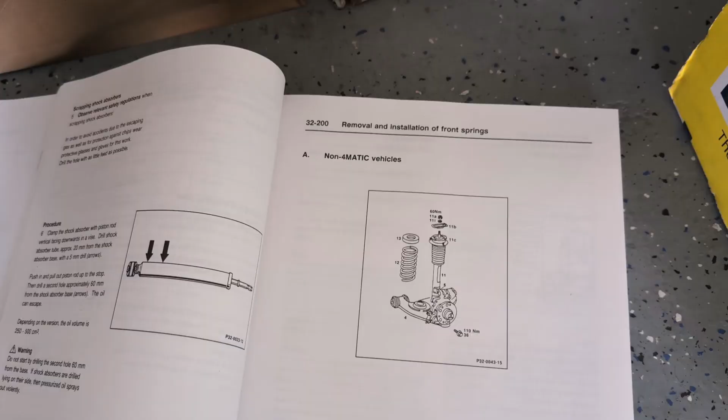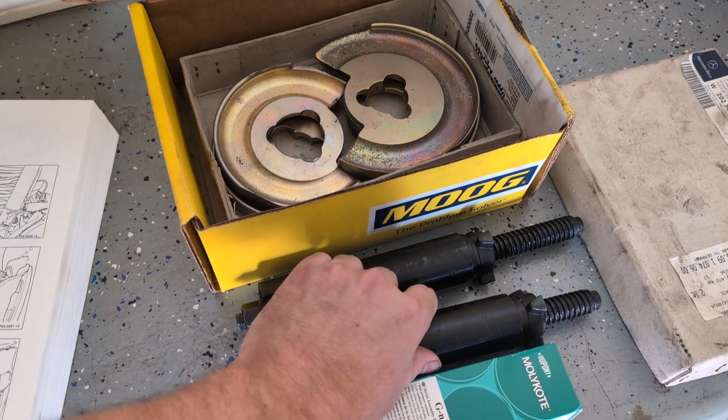Okay, just for what I got here, my setup: I got the book open to 32-200 for the removal of the spring. I actually just recently got the OEM spring compressors. I had the cheap ones you get on eBay, and it's a little scary working with springs, there's a lot of stored energy in there. And then I also was able to get the Mercedes plates.

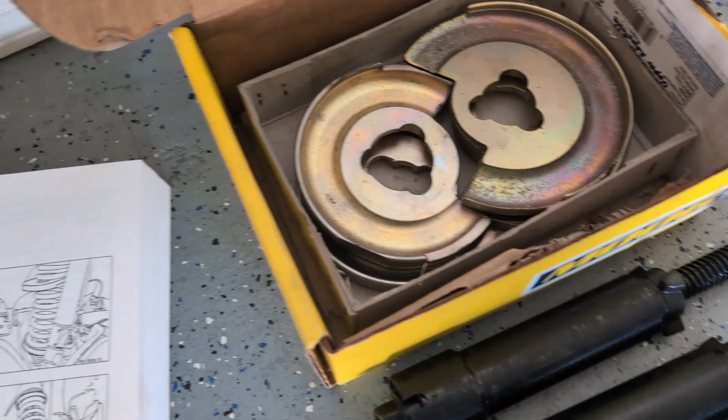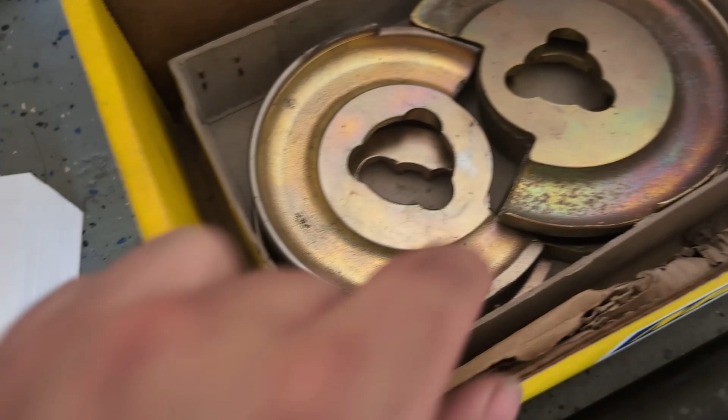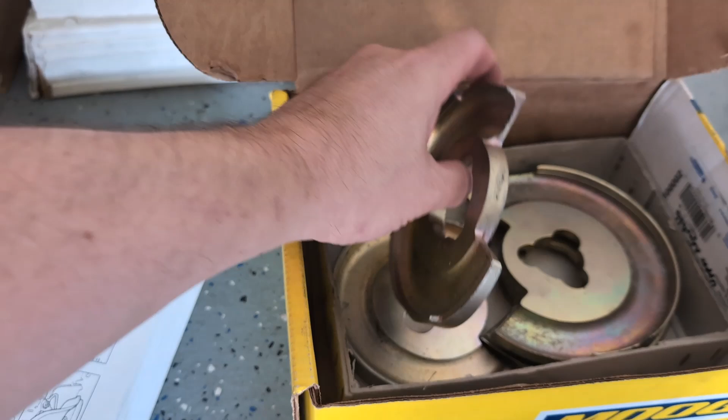So once this thing's up in the air and I get the wheel off, it's going to go down pretty easy. Basically you just put the plates, I believe it's going to be the smaller ones for me here, and you put them in the center and just kind of turn them around until you get the bottom one on the bottom and the top one on the top. So that one goes on top, and this one should be going on the bottom.

And once you got the springs in between the plates, then you can insert your compressor. I got two, just because that's what it came with. The longer one is for the front and the shorter one is for the rear. And then I got the molykote lubricant, so I'm gonna lube this up before I go and actually use it, and then probably after it's done too, before I store it.

And then here's the parts. Would have liked to go Mercedes on it, but it's kind of a big price difference, and I'm okay with this. This is the original manufacturer. I don't know if the parts quality will be the same.

You can usually tell here. So here, made in Brazil, so that could be questionable. We'll find out. For the ball joints, made in Malaysia, so yeah, we'll see about those. But yeah, anything's better than what I got on here right now.

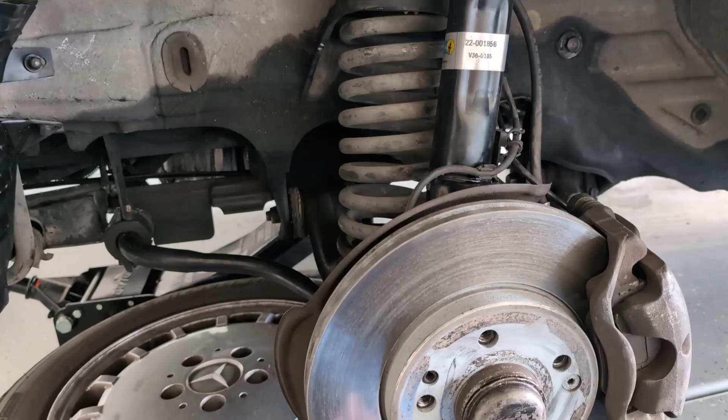So gonna get this up in the air and get started. Okay, car's in the air. Got the tire under there just in case. And I'm gonna get started with this spring. This is the front driver's side. So I got my lower piece.

And this is what I'm going to do, is just find a place where it goes in. Okay, so I got it in there, and then you just need to rotate this. It should make sense here, hopefully, but I want to rotate this until it gets down to the bottom. You see how it's starting to move down the coil? Okay, just keep going. That might be it right there. I think that's all I can get.

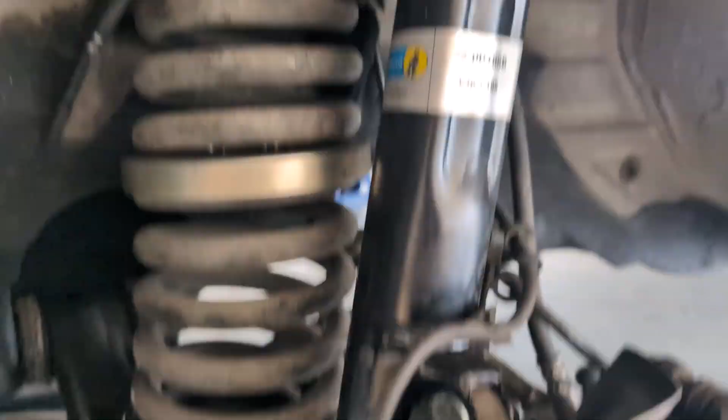So call that one good, and then let's try the top. This is going to need to go this way. Okay, so now do that same process. And this is the part where Mercedes was saying you need to have 8 coils worth. We'll see if we get that here. If we look at what we got right now, we got 1, 2, 3, 4, 5, 6. So I'll go up just a little bit more, see if we can get it.

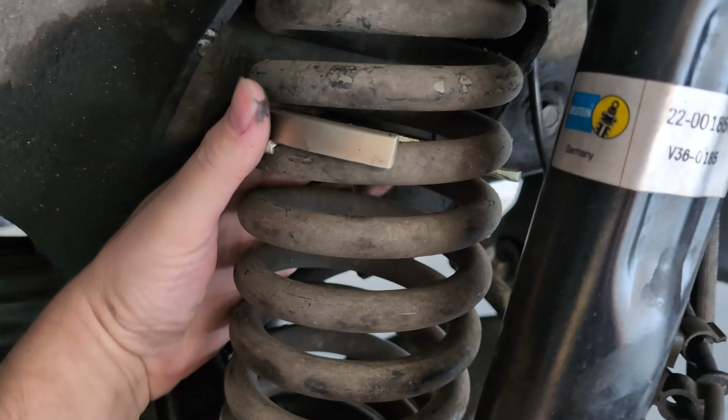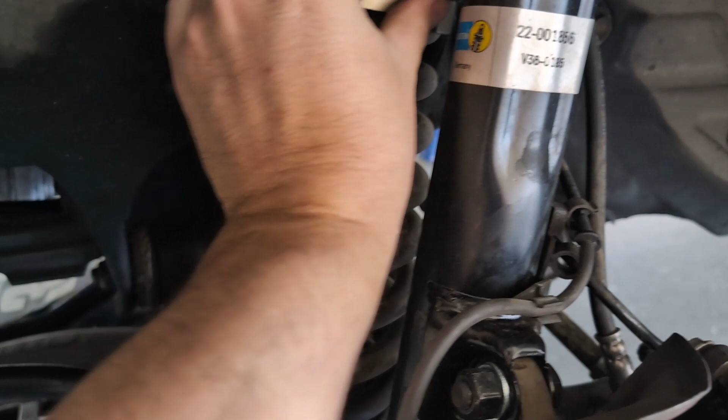And then we can put the compressor in. Okay, this might be tough, but we'll see. Okay, yeah, I think that works. Okay, yeah, and see, if you try to pull it straight out, it won't come out. All right, let me try the next step. So 1, 2, 3, 4, 5, 6, 7, 8. So I got roughly 8, maybe 8.5. And yeah, that's as far as that one will go.

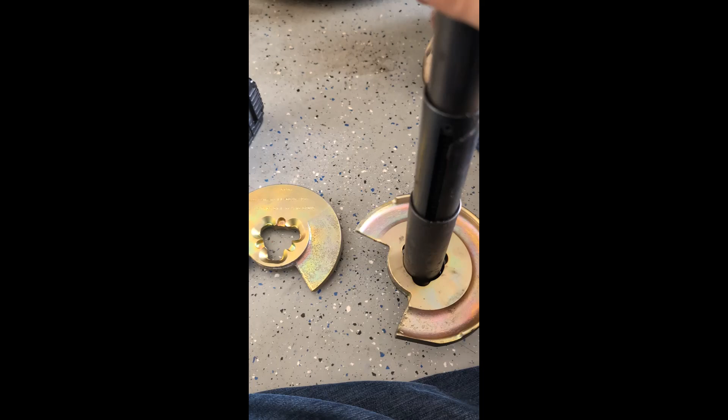Okay, great, here's what's gonna be happening here. So I got this extended out, this is the longer compressor. I'm gonna go ahead and just put the bigger plate on, which is more for, I think, the W126 or 129. So here we go, got the bottom piece on. Then what's gonna happen is you're going to feed this up. There's a hole underneath the shock, the spring.

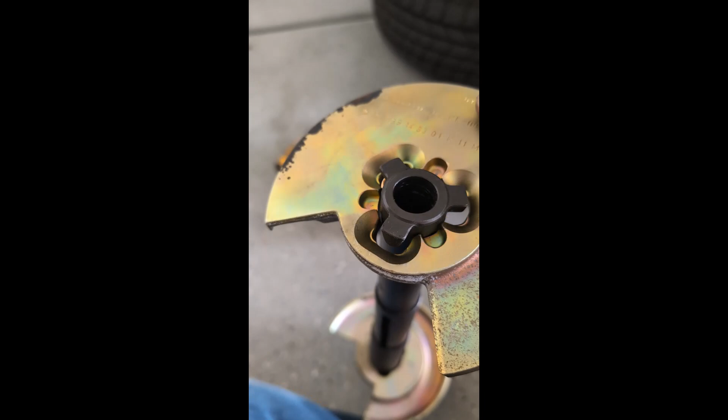Okay, so you feed it up through the bottom plate. When you get to the top plate, you'll have to go through at the right angle to get those little arms through, and then you can kind of turn it. And then you want to get those in those divots that are made for this. There's 3 of them, you want to get that in there. When you get that in there, that's when you can start tightening it up.

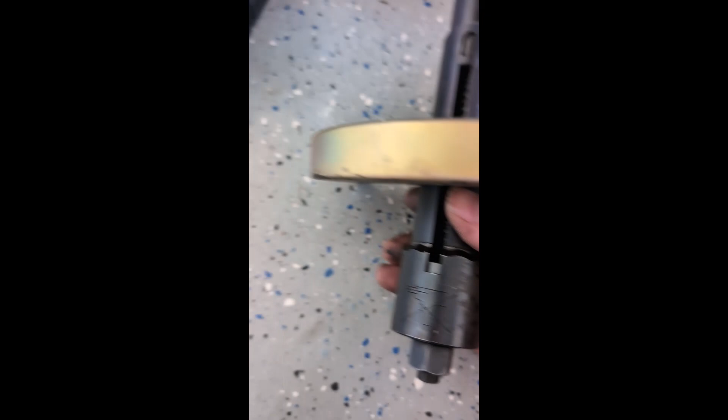And so when you start tightening it up, you'll notice, at least on this part, it says no impact tools, so you're supposed to just do it by hand. And this one, since it's genuine, is quite easy to turn by hand, actually.

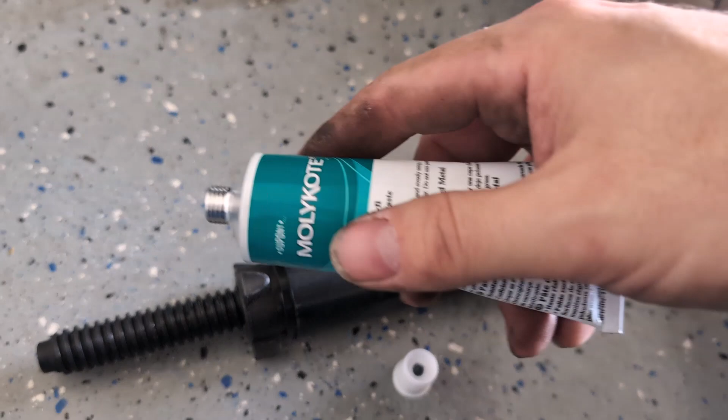But I'll leave that one up to you. I'm pretty by the book, so I'm just going to get a ratcheting wrench or something like that and just do it. One last step before I get started is I'm going to use that lubricant, the metal assembly paste. I'll put some on here and get a rag to wipe it around the threads.

Okay, I got it in there, and just holding the bottom, give it a couple twists. I know that it's engaged with that top plate in those particular holes it needs to be. Then you can start tightening up on the bottom just with your hand, and that will start moving the base up into the bottom plate.

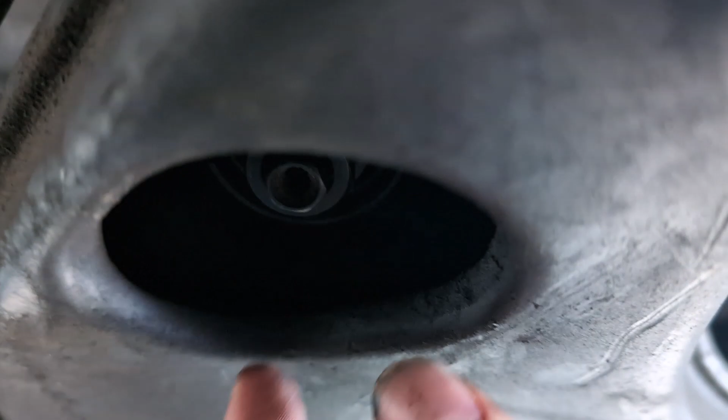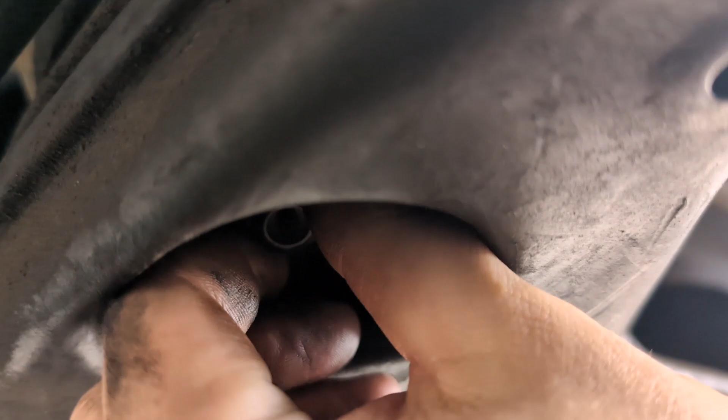Once that gets tight, I'll get the wrench out. Let me show you where I'm working with too. There's hand tight, and here's the area you have to work with. I'll have to use a socket, I think it's 19 millimeter. Then just turn that one clockwise, and that'll start compressing it.

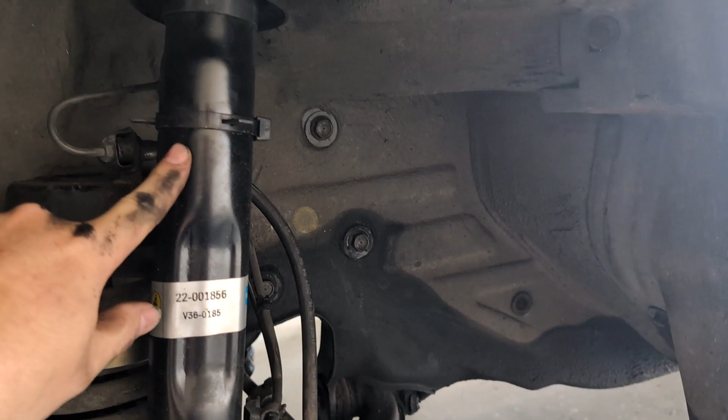All right, it's come along nicely. I think you can barely see where they go into notches on the spring compressor. So this is getting pretty compressed. I'm gonna go just a little bit more if you need to. The manual says you can undo the top of your strut to give it a little more clearance, and that should make it easier to take out.

Okay, I got a bottle jack under the control arm, and I'm going to go ahead and just loosen up from the top here. I know you're not supposed to, but I'm going to use an impact on the top. The reason I got it supported is just so that it won't fly down.

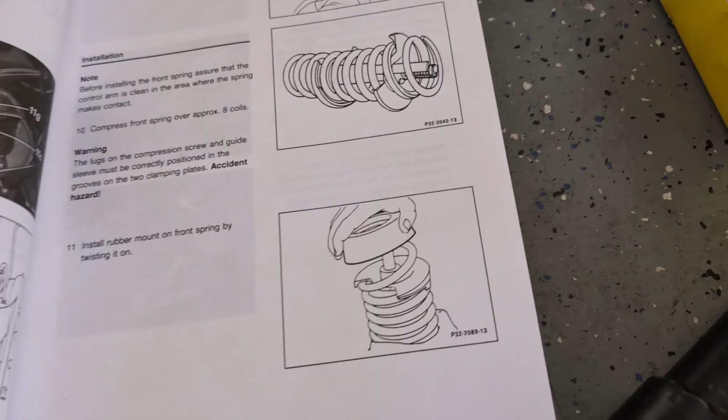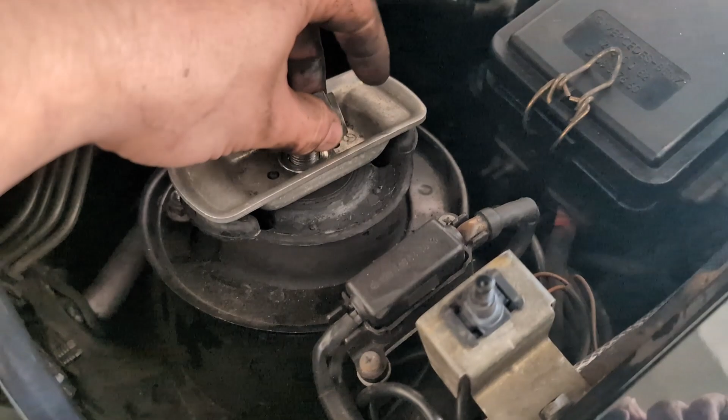Yeah, the manual shows the typical way of doing it, where you have to put an Allen in the middle and then you can get a 22 on the outside. But I just used my 22 with my impact. All right, now that that's off, I can go ahead and lower the bottle jack slowly.

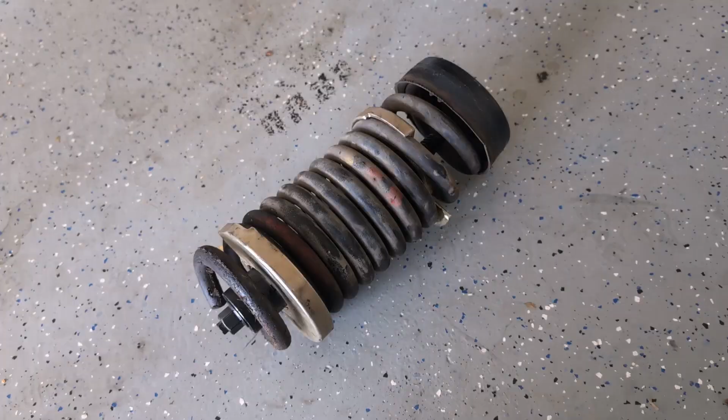Yeah, when you go to the junkyard and do it, you just hear a boom when you undo there, because they usually have the wheels off already. All right, well, I'll just kind of mess around with this till I get it out. Okay, and there it is, I just had to kind of wiggle it.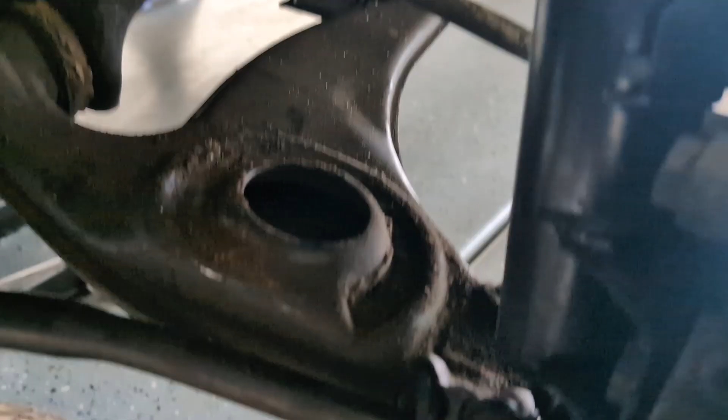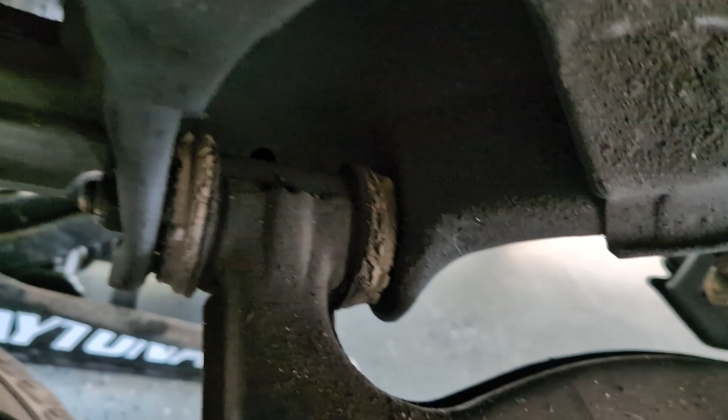It's definitely scary. For me, this is like the scariest thing possible. I think what I'll do is just loosen up the tension on here so that I don't have to worry about this thing flying out and killing me. While I'm looking at this and cleaning the parts, good thing I got this—I can basically disconnect it from the ball joint there on the spindle. And yeah, you can see those control arm bushings have definitely seen better days.

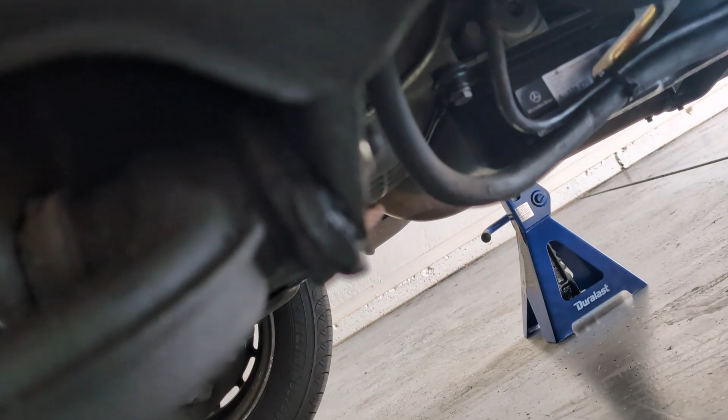I didn't think too far ahead because I don't have a press. These ones are just ridiculous. So it would be great to get some of this done. Definitely need to spray some brake clean on there and clean that out, it's nasty. But first things first, just at least make myself feel more safe about this.

So I'm gonna uncompress this and come back. This video is just for my reference, so this section I'm just kind of looking at where my plates go. I have this one between the first and the second coil. I marked it so that as I uncompress this, I can put it back in the same place.

I'm thinking I'll go all the way with it and then just clean this spring too while I'm at it. Yep, this one here—this is called the first, the second, this is on top of the third, going into the fourth, and so there's my markings. All right, so I'm just gonna keep uncompressing this until it's completely safe, and I'm really happy about that.

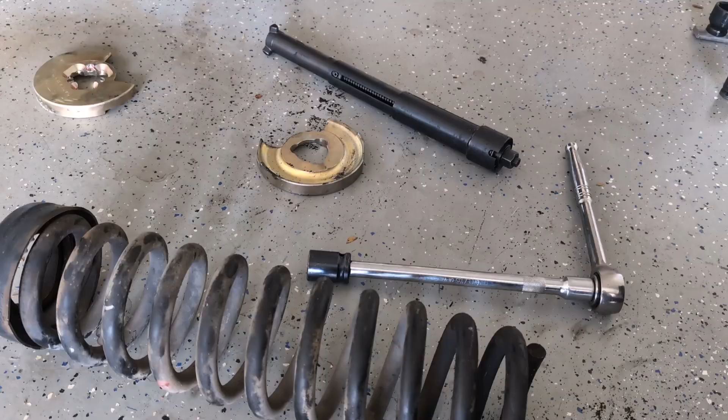So there we go. All right, so what I did, I took the strut out, got that set aside over there. There's two 19 millimeters on the back, you can see where those holes go. And then there's one right here that I looped my little hook through—don't want to break this flexible brake line.

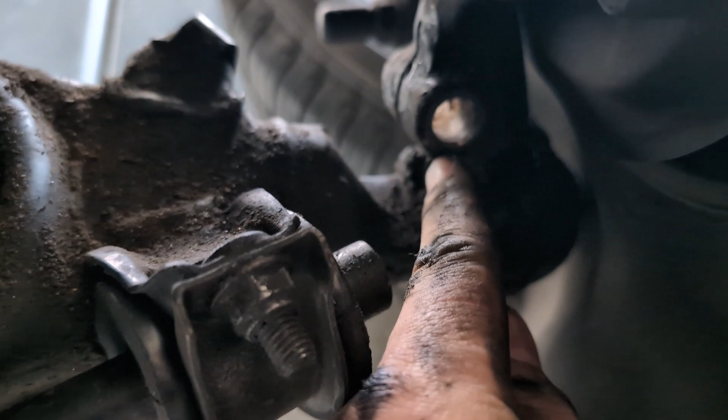So now I just had to do the ball joint, so it has the thing there too, the 19 millimeter. So now that that's free, I'm just going to get a pry tool in here and try to separate the ball joint from the control arm, or from the steering knuckle.

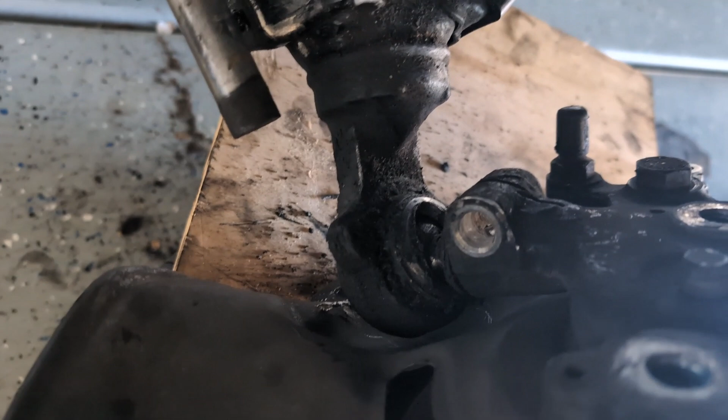Now here's an important step I did. I got a piece of wood under here. I ended up taking the caliper off, set the brakes aside, and that way it's just out of the way. It's also less heavy when I'm trying to pick up and take the spindle off of the ball joint.

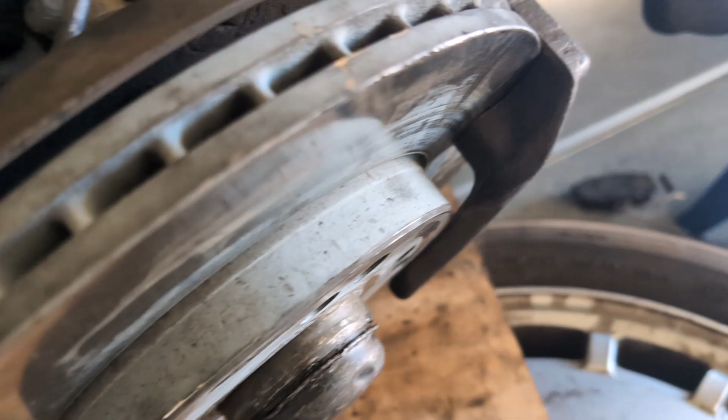It's not clearing. So this dust shield, I've taken my pliers, bent it, you know, all that kind of stuff. It's not going. So this is a tip I saw in Matt's garage. Basically you just take this 5 millimeter nut out of your rotor, and then you'll be able to wobble it out. You don't have to take your floating brake caliper out, but that should give you enough clearance to do it. So let's see if that works.

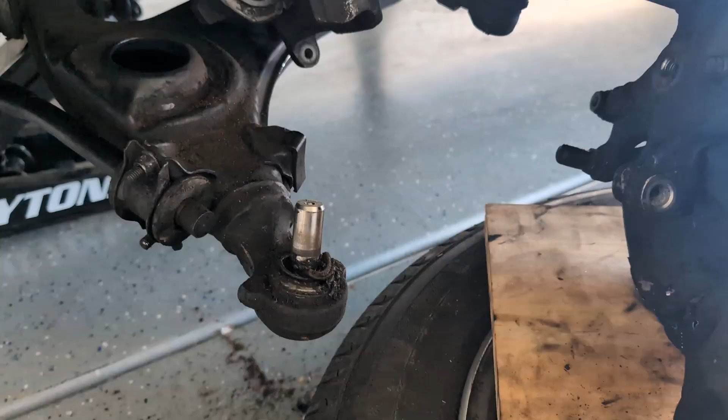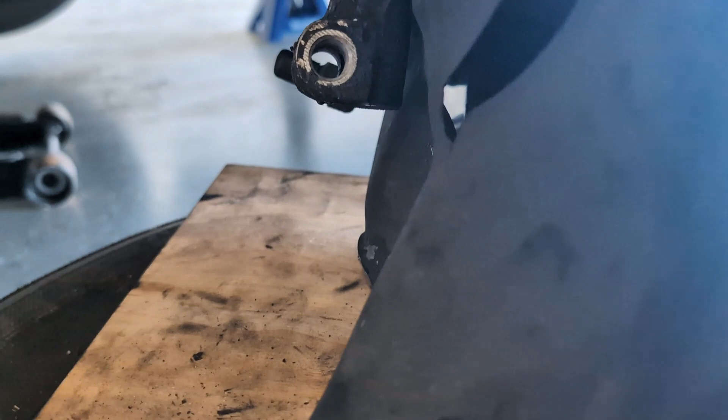All right, loosening up that rotor gave the clearance. You can see where I used the pliers at first before I loosened up the nut on the rotor. That gave it the clearance it needed to get out. See, if you look at that, it's got a straight shot down. So that's what it needs. It actually curves inwards towards there too. So when this gets reinstalled, I'll have to put it back on.

But wow, look at that ball joint. That's toast. So yeah, no wonder I'm getting a lot of swaying around on the highway. So next step, I'm gonna go ahead and take off the sway bar bushings, and then I'm gonna go ahead and take off the control arm bushings.

All right, so now for the bushings. Believe it or not, I actually got it loose like this. So I have my 22 millimeter, and I have the other wrench hanging there, so just holding that one with my right, and then I broke it free with my left. I did hit it with PB Blaster. I did hit it with the electric gun.

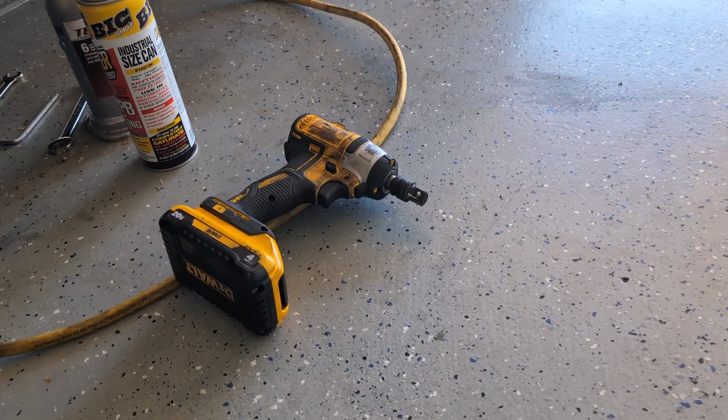That did nothing. I busted out my air gun. That did nothing too. I mean, maybe it loosened it, I don't know. But it made a lot of noise under the car, my ears are ringing. But you know what, I got it loose with this. And I already hit the other side too, so it'll probably be just as easy. So this thing should be off pretty soon, and then I should be able to start brake cleaning this, the spring.

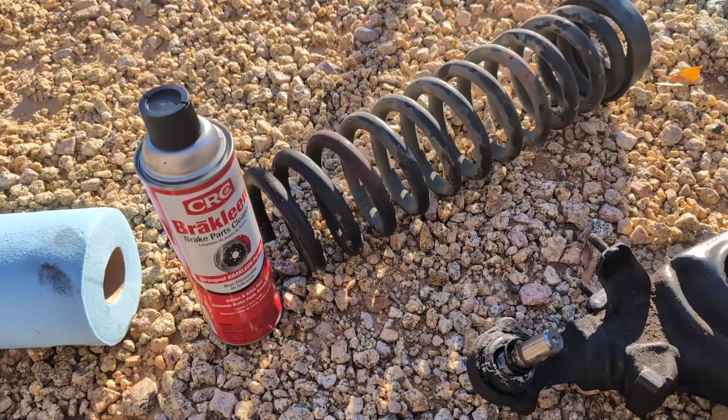And then I have a tool for popping that ball joint out, so we'll see if that works. And then we'll see how to take out those old ones and see how it goes. Before I get all crazy with the brake clean, I just wanted to show here's the assembly removed. You can see the line where the spring goes at the end. It goes around.

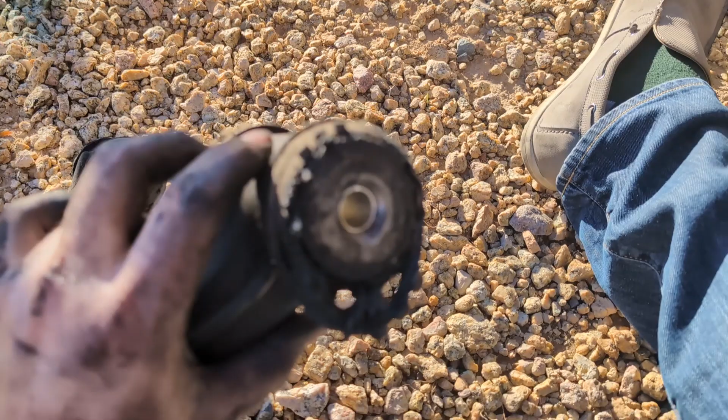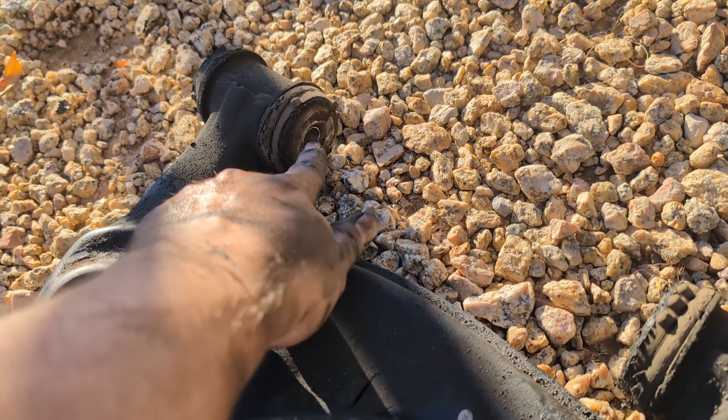Yeah, this ball joint is just awful. These control arm bushings are really, really bad too. I mean, this one's just falling apart. This side's not horrible. It's not good. So yeah, I'll hammer out that centerpiece first, that little metal thing, and then just see if I can get each side out and see how it goes.

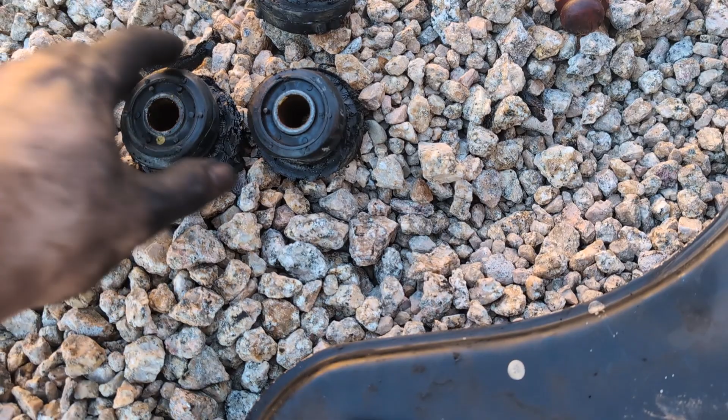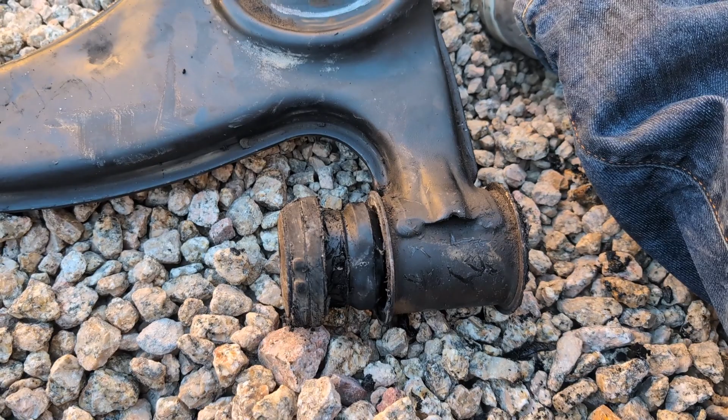But I'm also just gonna hit this with brake clean just to get this thing cleaned up. This is just nasty, and I want to get it cleaned up before I get the tool out for the ball joint. Okay, this is by far the hardest part that I had to do. Getting the bushings off, and you know, they're already in pretty shitty condition, but this sucks really bad. But I found a way that works pretty reliably. Once I got one off like that, I got the other three off pretty fast, matter of minutes.

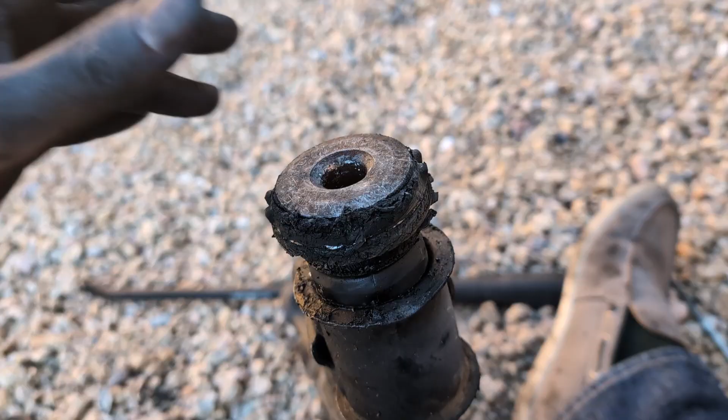So what I would do here, and this is hot, so kind of stand it up like this. Let's say I'm doing this top one. Okay. You got a pair of channel locks, and then you have to go kind of in the middle. So grab it like this, and don't grab the lip, the part under here. Grab the bushing with the other side.

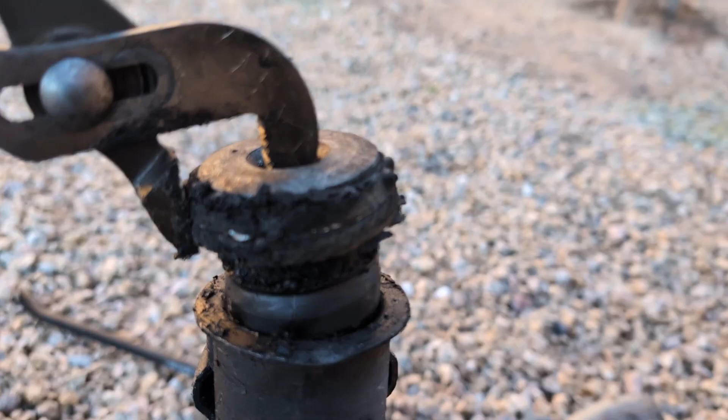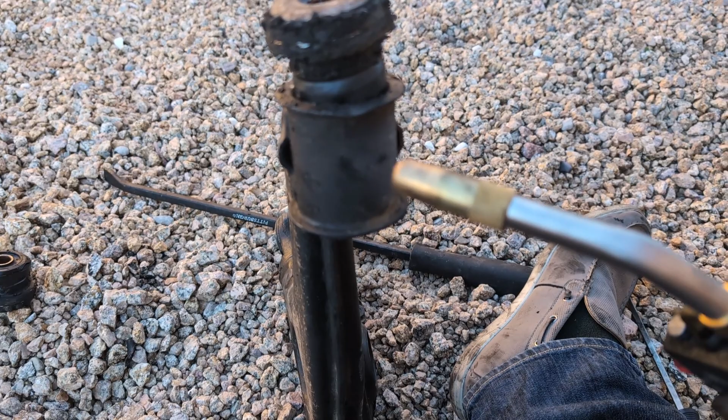And then what you need to do, and I can't really demonstrate this, so I'll just let go of this. Basically, you need to get your MAP gas, and you need to hit it all where that bushing is inside of this piece. Get it on this side, get it on that side, hit it for a good minute or so. And then once you do that, you can get your channel locks, grip it super hard, and just try twisting it. Eventually it'll start twisting, and then you can get another grip, twist it, start pulling it, and then it will come out.

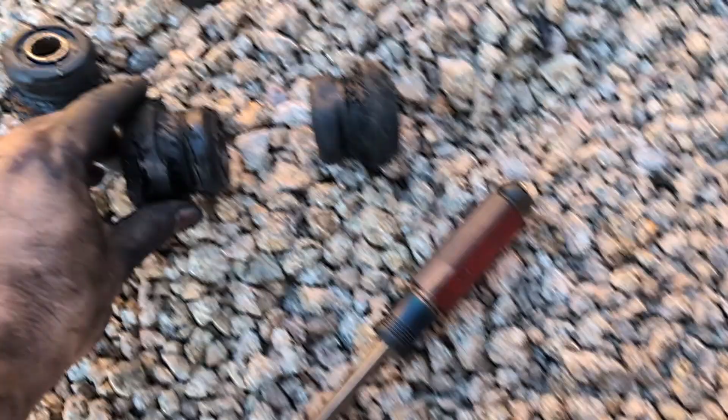I didn't have to use any other tools. That was all I had to do. At first I was trying chiseling and all this other stuff. You're not going to get it, I don't think. Maybe you can. And you can't use a press, because they each come out of their own side. The rear one, I think you can actually use a press.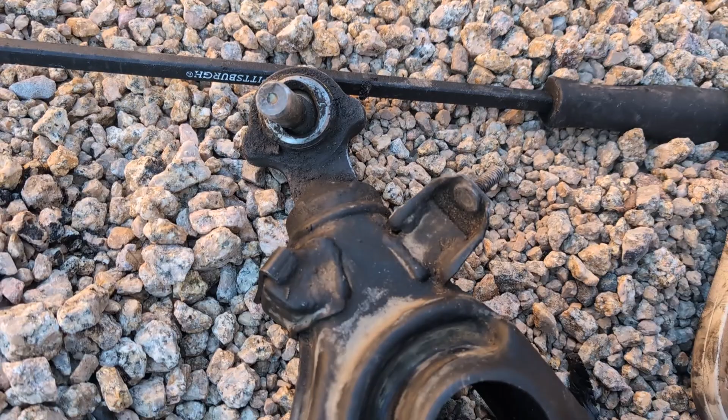So that was fun for today here. Definitely looking like I won't finish the job today. I think I'm going to go and get the ball joint tool and at least get this off of here, and then I can do a final cleanup on this part.

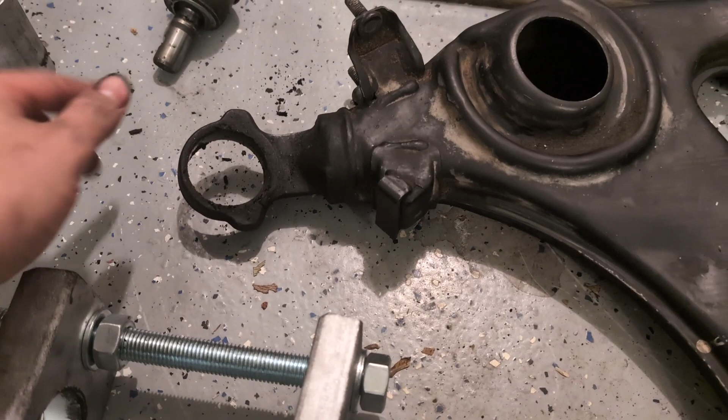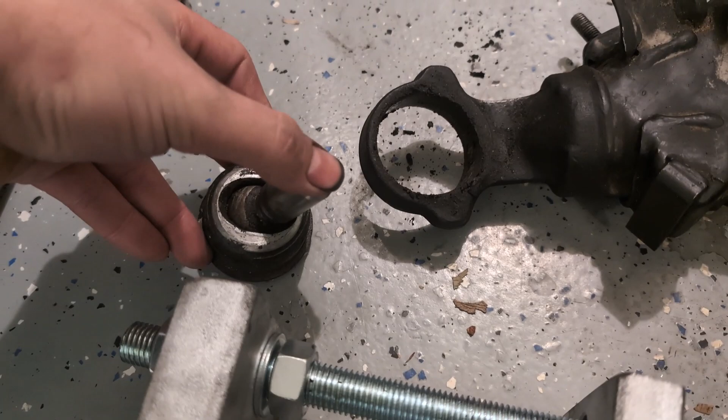And here's the last part. After I got the control arm bushings out, I had to just pop that ball joint out. That was not too bad. But I mean, yeah, this looks terrible. Looks like it's been ovaled out. I don't think it's supposed to be like that. It's pretty bad.

So anyways, then I have this press. Basically, you put this top piece on, and then you can slip this over the top, slide that part under, and then just start tightening this part, and it'll start smashing that cup through and push the bushing right out.

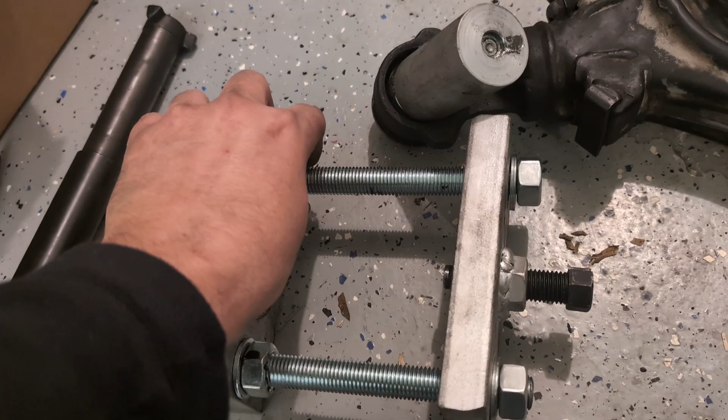There's some kits that have different kind of cups and everything. I just got this one on eBay. It was by a place called Gun. It was a German company, so they shipped it from Germany. I think it was $70. Yeah, it got it out pretty easy. Just had to figure out how to put it all together, because there's just not really good instructions.

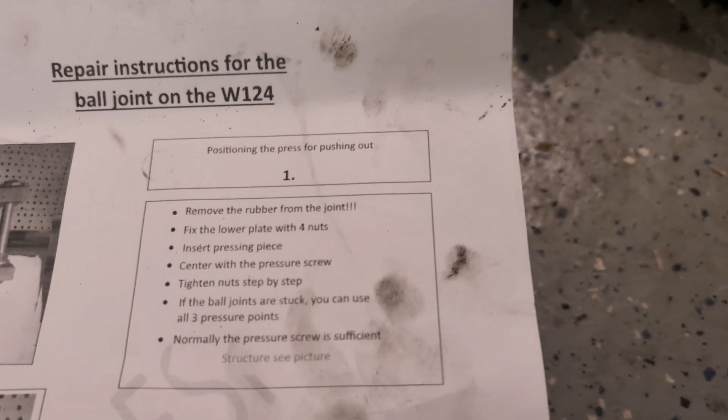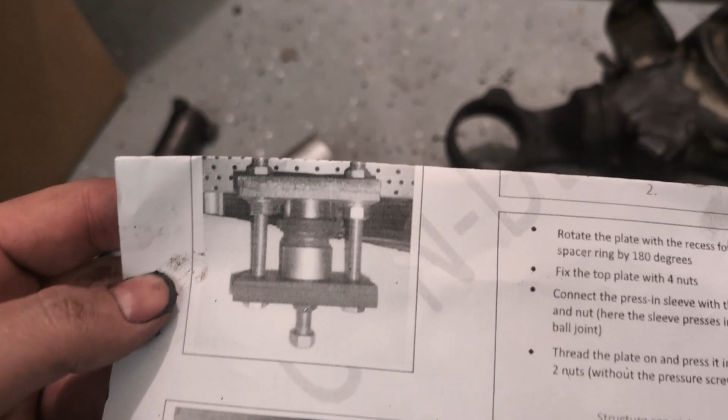The only instructions were in German, so I translated it using Google Translate and printed a copy of what they wrote. They just had a picture in those, but anyways, not a big deal. It works. I'm also going to use this to push in the new one, so I got the cups for that too, and then that will push in the new bushing.

So my goal tonight now is just to clean this up, just brake clean it, get all of the crap off of here now, and that's it for today.

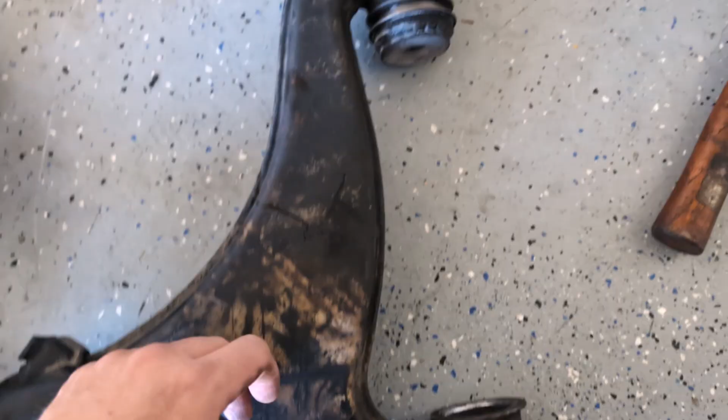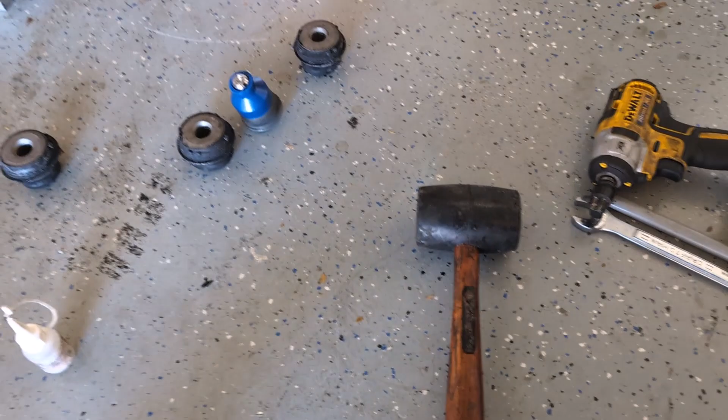Okay, day 2. I have the control arm bushings that were in the freezer, so that hopefully it gets a little smaller, easy to get in. I've already got 2 of them in, not all the way, but there is an orientation which I didn't know about. And so if it's right side up, this is the left side, of course. When you're looking at it like this, it needs to have the 3 lines over here.

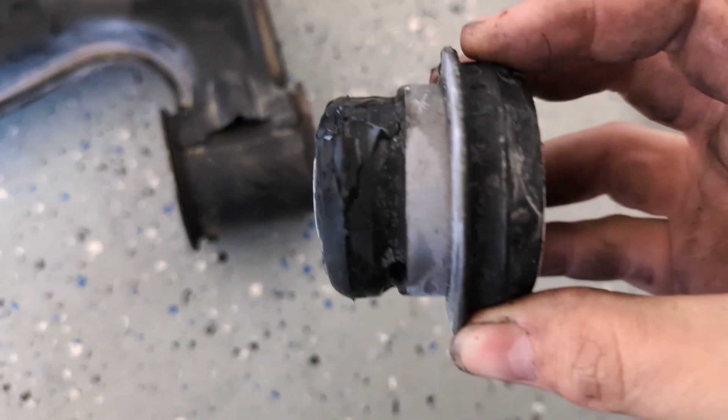Maybe I'll turn this before I push it in a little way. And then this side, it needs to have the 1 line on top. And so what I'm doing is just putting the rubber lubricant all around the edges. Let me see if I can show this on video, just a second. Okay, so yeah, I got the stuff just coated with the rubber lubricant, and just kind of line it up.

And then I'm just basically turning it up. I'll put the camera back up in just a second. And I'm turning it like this. Then I'm gonna go ahead and step on that top piece. Doing this one off camera. Stepping on it. Okay. Yeah, and that gets it in there.

And so what I'm thinking at this point is that I'll probably put the bolt through and then tighten it up to get it going, or yeah, I don't know, we'll see. And I'm just gonna triple check, turn these the right way, make sure it's good. So yeah, that's going back in. And then over on this side for the ball joint, I got the press. So I'll go ahead and use that in a minute. And then this is all ready to put back together finally.

Yeah, so here's how I'm getting it back on. So I just took the plates, those washers from the original area where it gets installed, put them on. I got my 22 to counter hold it, and then I'm just ratcheting this on, and then it's squeezing that on. So I'll do that for both sides and then get to the ball joint.

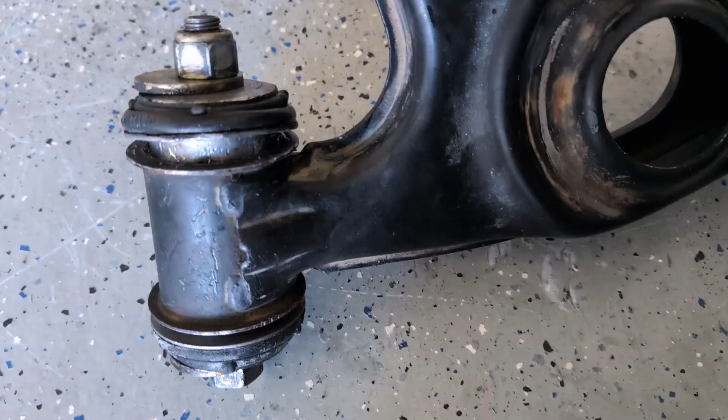Yeah, this sucks. I keep ending up with something like this where one half goes in a little further than the other. And it even happens on both sides too. So it's just ridiculous. I'm not sure how to get this. Obviously the alignment matters when you push it in, but it looked pretty even to me. And that means there's probably a special tool for this.

Well, unfortunately, this was going to be the end of the video. So I tried really hard to get those bushings in there, and came to the conclusion you definitely need a special tool or a hydraulic press, or there might be a trick to it. I can't find an obvious solution. So I pulled out the ones that were there that were dented. I'm going to throw them out.

And then basically I just gave up, went to FCP, found the entire control arm assembly for the left and the right, ordered them. And so those will be here this next Friday, in basically 6 days. So I'll cut the video here. I'll edit this, upload it, and this is part 1 of the lower control arm ball joint remove and repair.